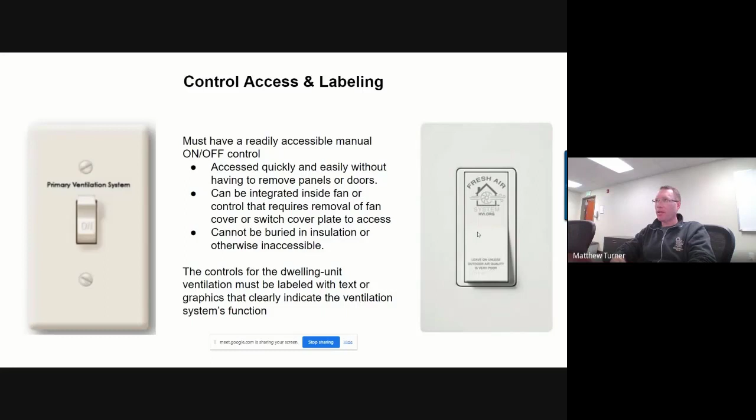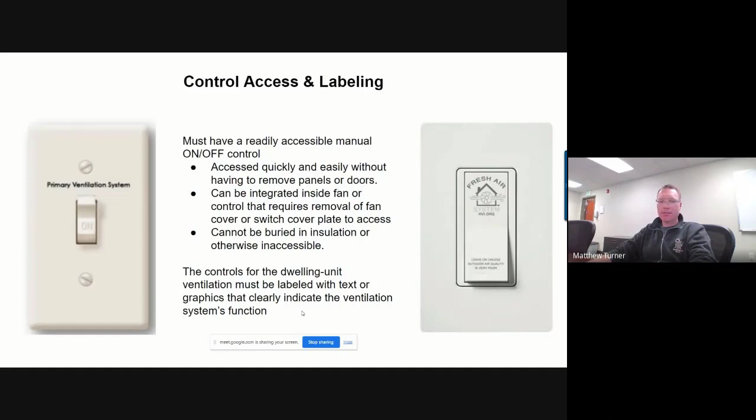So I feel like both of those give the occupant a little bit of an idea of what that switch is for. Hopefully it'll help them remember if somebody new moved in. They might scratch their head about this one. This one would probably be a little easier to understand. So I'd ask you at all of your agencies to ask yourselves, are we putting labels on our controls? And do those labels make sense to the lay person? I did see a label recently that said ASHRAE fan on it. And to the lay person, that probably won't mean much. So maybe rethink what you're putting on that label if you would. So it meets the standard, but give some thought to making that a little clearer for our clients.

The other thing, this one I've actually seen a couple of issues with, and I wanted to talk about it. I don't know if you guys are aware, but clothes dryers are required to be exhausted directly to the outdoors as part of the ASHRAE standard. If you read the ASHRAE standard, it's in section 6.3, and this is exactly what it says.

And then it has an exception for condensing dryers. If somebody has a high efficiency condensing dryer, they don't have to be exhausted at all. But most of our clients' clothes dryers blow air out the bottom of them, and they need to be exhausted to the outdoors.

But yeah, I came across a couple of houses recently where I was out monitoring, and one of the clients brought it to my attention that they didn't think their dryer was venting to the outdoors. And as we dug into it, we found that the client was correct. Although there was a termination, when you turn the dryer on, nothing came out the termination. It had somehow gotten disconnected.

And another one, I recently was going through a file, and in the file, the auditor or the crew, I can't remember which, wrote that the dryer terminates underneath the mobile home, but there was not enough room under the mobile home to get under there to work on it. So the note was basically saying they left the dryer venting directly under the house.

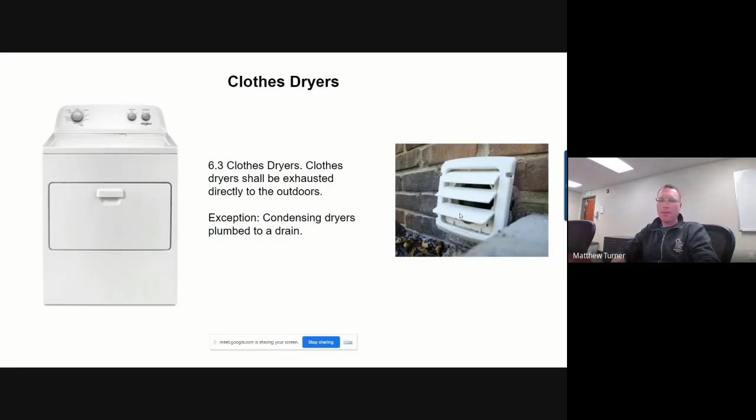So if you run into that type of situation and you are limited on room and space, you're going to have to think outside the box as to how to vent that to the outdoors, whether that's changing your method of running the ventilation under the house or looking for other routes for the vent to run through. But just want to make sure everybody's aware of that. That is an important part of the standard.

This one's just for fun. I haven't seen any issues with it, but carbon monoxide alarms are also part of the standard in section 6.9. In order to comply with ASHRAE, we are supposed to have carbon monoxide alarms in all of the homes that meet the current code, which is one alarm on each habitable level.

And it also specifies it has to meet the NFPA 720 standard, which is, it's got to have the digital readout on the screen, and it's got to have the, is it a 5 or a 10-year battery? I think it's a 5-year sealed compartment, if I remember right. Anyway, I think we're all in compliance there, but just fun fact, carbon monoxide alarms are part of meeting the ASHRAE standard. So any questions on those couple of items before I move on to this next thing I want to talk about?

Okay, so the other thing was I've noticed something at multiple agencies on many homes, and it's just had me wondering. I've asked a few of you some questions about it, and I just want to talk to the whole group about it in case anybody else has run into this situation.

So on the screen, I have a wiring diagram. Brad, the electrician, don't look at my wiring diagram. It might not be up to code, but here's a wiring diagram. This is a typical exhaust fan. This is in most homes. If there's a fan in the bathroom, this is probably what's going on behind the plaster.

There's a service panel somewhere. There's a wire running from the service panel to the junction box that holds the switch. Inside there, the wires are spliced like so, and then the wire runs from that junction box over to the fan. When you flip the switch on, the fan turns on. When you flip the switch off, the fan turns off.

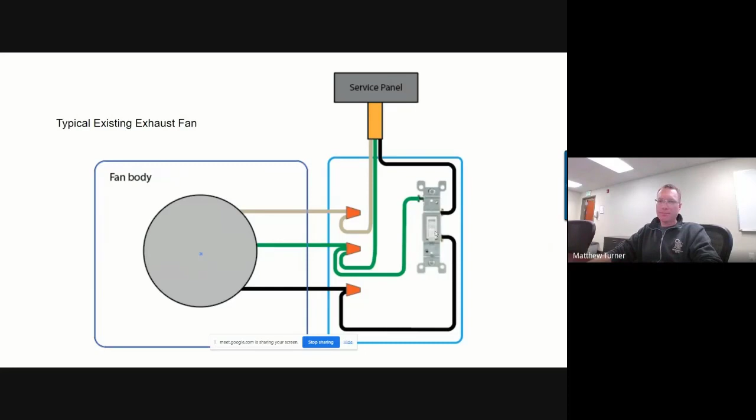Typical wiring. And then we come along, and if we are going to replace that fan with the Panasonic WhisperGreen Select, which is kind of our go-to fan, then this is what we do with the wiring. That same wire that comes from the service panel to the little junction box that holds the switch, that's where we splice the wires together.

And we use the wire that was running between the switch and the old fan to essentially hardwire and power the new fan. And the new fan's smart, so it's okay that we're hardwiring it. That's the way it's designed. And then it has this cool little multi-speed module inside of it. And in order to get that thing going, we have to run an extra piece of Romex between the switch and the fan so that it can control the multi-speed module. And that's what we typically do to get this thing going.

And I guess before I get into the issue that I'm seeing, I want to talk about how this fan works. So inside the fan, it's got a couple of things going on. One of them has this pick-a-flow switch, and that's essentially the speed for our on-demand fan. Like if it was just like our local exhaust fan, where you walk into the bathroom, you flip on the switch. When you flip the switch on, then this fan is going to ramp up to whatever speed you have set on the pick-a-flow switch.

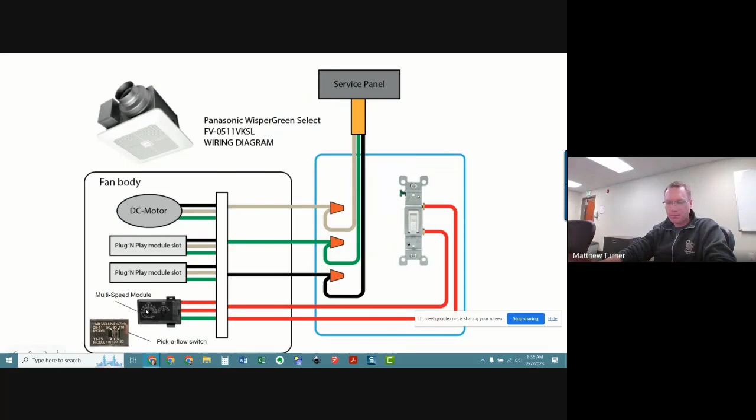As I've been out to agencies this year, I'm seeing a lot of this setup. And what this is, we've got our Panasonic Whisper Green Select set up. But instead of just having a regular switch, the agencies are putting the AirCycler smart exhaust switch into the system. And I think that the reason they're doing this is that it is either difficult or not possible to run that extra piece of Romex. But my question is, when you do this, what is it doing to the multi-speed module?

Why are you wasting your money? Disabling it. Why are you wasting money on a module fan to navigate that? You're paying more. You can buy a fan that runs off a normal switch for less than the module. So for us, we use the motion sensor. We bypass the switch entirely. We don't run any new Romex. We just put a motion sensor in there. It's $30. That way, when the client walks in, fan kicks on, ramps up, and then they walk out. Whatever we have our delay set to, it'll ramp back down to its continuous CFM. So we just take the switch out entirely, hardwire the fan directly.

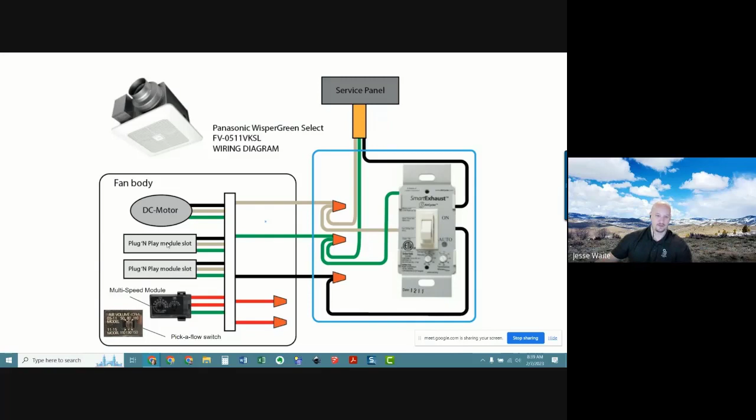So it will run continuously. If this is set at 50, it'll run continuously at 50 without this signal wire. Right. Until the motion sensor senses you, then it'll ramp up to that 80 CFM that you have it set to. And then when you walk out of the bathroom, whatever your time delay is, say it's 5 minutes, 5 minutes later, it'll ramp back down to the 50 or whatever you have it set to. And that's the whole point of the plug and play. That's why they have the motion sensors. That's a great strategy.

And you guys may be aware of others as well as I go through this, but as you heard Brad talking, my whole point is this, and what Zach said: if you wire it up this way, you're essentially making this multi-speed module obsolete. Like you're not using it at all. You bought a fan that costs more and you're not using the feature.

Yeah. Now the smart exhaust switch is a nice switch. It is smart, but we now have 2 smart modules and we're only using one of them. The smart exhaust switch is a good way to do the existing fan. Is it intermittent? Is that the right term? I think those will set up your... We have continuous, too. Well, if you turn it all the way on, they do intermittent.

This is how the smart exhaust switch works. So it's got the same delay minute dial. So you can turn the delay minutes to 10 or 20 minutes. And if somebody flips the switch on and then they switch it back off when they leave the bathroom, it'll keep running for the 10 minutes or whatever you have the delay switch set at. But they don't control the speed of the fan at all.

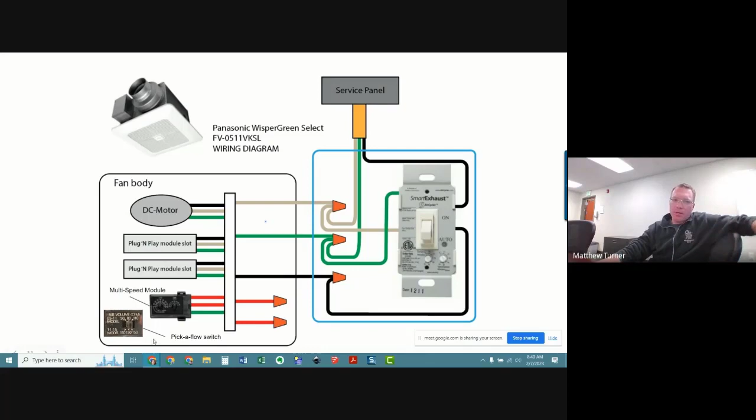All you have going on is whatever you've set the plug or pick-a-flow switch at, so this is now at 80. When this thing is switched on, it's going to run the fan at 80 CFM. When it's off, if there's delay minutes, it'll keep running the fan at 80 CFM. And then, sorry, can't remember which way to scroll. On the right-hand side here, it has ventilation minutes, and you can just tell it how many minutes per hour you want that fan running, but it's still only going to run at 80 CFM.

And the way that it works is if you have it set to ventilate the bathroom for 20 minutes out of every hour, at the top of the hour, it is off and it will stay off until there is only 20 minutes left in the hour, and then it will kick on and run for 20 minutes. And the reason it does that is in case somebody goes in and uses the bathroom. It starts at the top of the hour. If somebody goes in and uses the bathroom for 5 minutes, so they flip the switch on, left it on for 5 minutes, and then they flip it off, and the delay minutes is set at 10, so it'll run for 10 more minutes.

So now it's already run for 15 of the 20 minutes that you needed it to. So then it will stay off for the remainder of the hour, except for the last 5 minutes it kicks on and runs. And so that way it ensures you get your 20 minutes out of every hour, regardless of how many times the bathroom's been used. That's how that one works. It's nice for an intermittent strategy, but

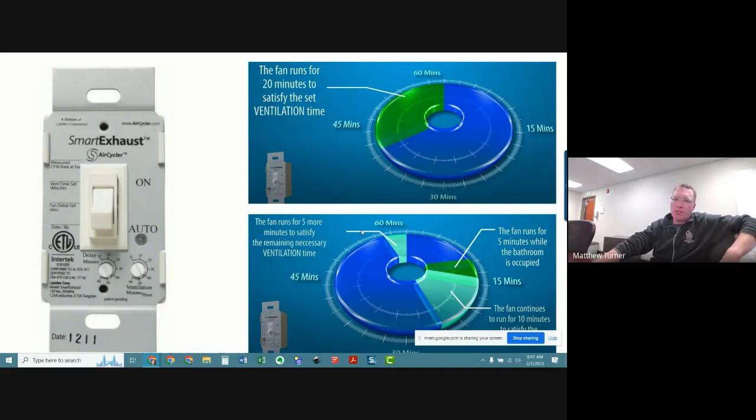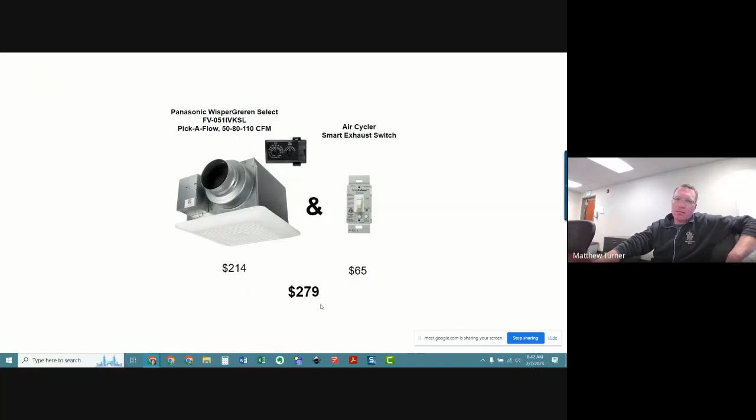I just went onto the interweb and I grabbed the lowest retail price I could find for this Whisper Green Select and the lowest retail price I could find for this. Hopefully you guys have negotiated better prices than these. But the combination of these is $280. You can buy the Panasonic Whisper Green Select without this module in it. It's a little bit cheaper.

It's $21 cheaper. So if you're gonna use the air cycler in the system as an intermittent fan, or if you are running into those issues where you can't run that extra piece of Romex, then you should consider having this on your shelf as well as this. Or you could consider buying just this, and this is sold separately, and then you could plug that in when you need it.

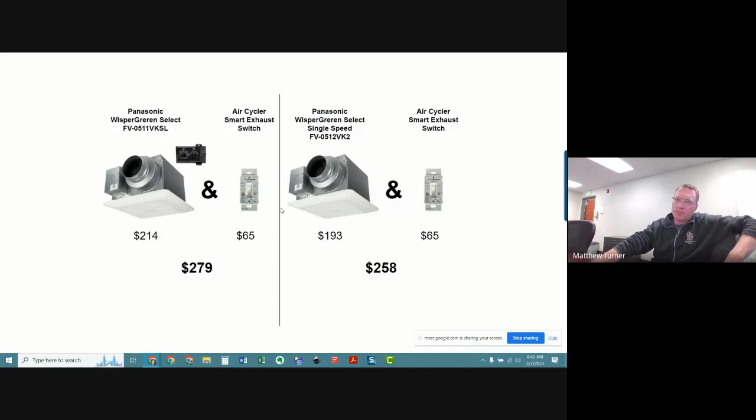Or another option is the Panasonic Whisper Value. So this is also the Whisper Thin, they've renamed it. This one's a great fan to have on your shelf. So this one has the pick-a-flow switch inside. It goes 50, 80, and 100. It doesn't go up to 110 like the other one. But it was tested at less than 1 sone at all 3 of those speeds. So it meets the ASHRAE standard for whole building ventilation.

It has a 3 3/8 inch deep housing, so it can fit into a 2x4 wall. It has a UL listing to be installed in a ceiling or a wall. So this one's very versatile. The one thing you need to keep in mind though with the wall install is that it must be installed 5 feet above the ground or higher. And it has to be installed with the duct adapter pointing upward.

So if you're working on an 8-foot wall, you have some limited space on how long your duct can be and where your termination is going to land on the exterior wall. But that's not a bad tool to have in your toolbox if you need it.

And yeah, just gonna say, so ours, we can't switch between 50, 80, and 100, but we have a bunch of the 80 CFM ones. We'll be happy to give them away to another agency, because they are loud. They're not quiet by any means.

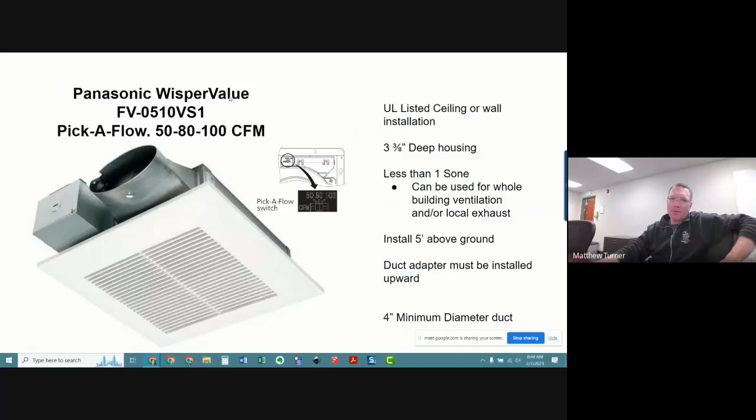No. Gotcha. Well, and I hope this doesn't just feel like a Panasonic commercial. I just pick Panasonic because I know everybody uses them. You guys are welcome to use any product that is out on the market. You have to make sure that it meets the ASHRAE standards. And the big one is the sone rating.

Matt, with ours, the Panasonic, when Lauren bought ours, he couldn't afford the Whisper, so we just bought the Value. I gotcha. Well, I'm glad you guys have recognized the issues there. They could be used as local exhaust fans if that was your strategy, if you were just putting in a local exhaust fan to decrease your local exhaust deficit. But I think your opportunities there are slim.

So anyway, I just wanted to point out, if you be smart about what equipment you're using, then you can save a little bit of money here. This Whisper Value, the lowest retail price I could find the other day on the internet was $95. So comparing it to this one, there is some savings there. I know you may be thinking, well, Matt, you're tripping over $20 here.

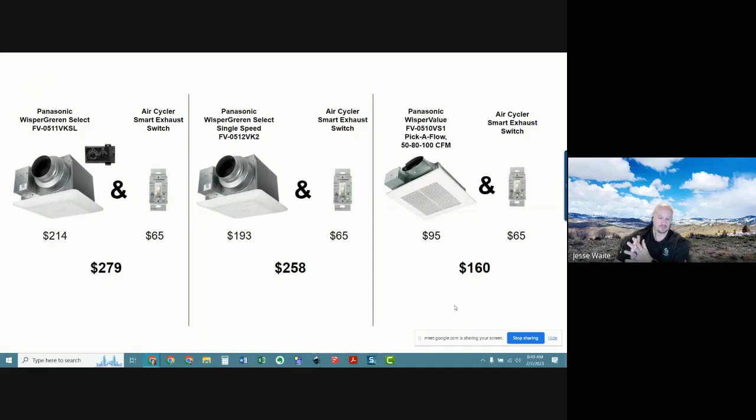No, I appreciate that. That's an excellent point. If I could make one point of clarification on that.

When I'm looking through a file, the trigger that allows you to fix or replace something is going to be the failed worst case draft test. So be very careful: if you think it's close, if it's passing per our standard, you are not justified in replacing stuff. You need to wait until it fails the worst case draft test in most instances. So

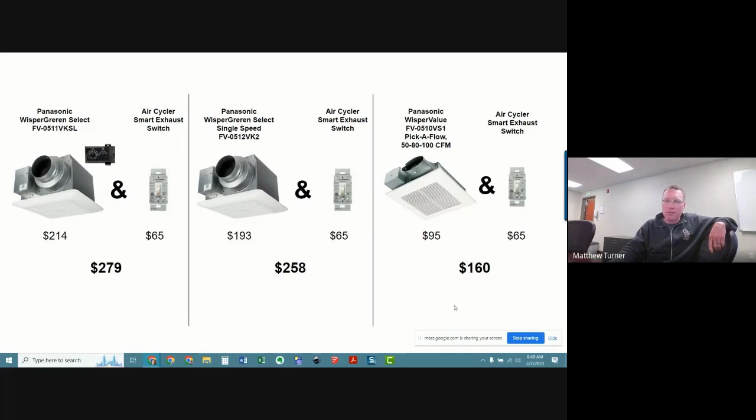I want to talk about the HRVs a little bit more. I've got a slide in a second, but a couple other things have come up. I want to remind everybody, I think I've seen these at almost every agency. Air King does have a range hood fan that's Energy Star certified, and it meets the ASHRAE standard. It's below the 1 sone sound level. They offer it in white, black, and stainless steel, and they offer it in 24, 30, and 36-inch widths.

So if you ever get into that situation where you can't figure out where to put that Whisper Green that you love to put in the bathroom, or you can't go through the roof because it's going to cause problems, maybe take a look at the stove. If you're in a mobile home or something that's starting to look more like a camper, don't forget that they do offer it in 24 inches. So maybe that's a good solution for what you're running into out there.

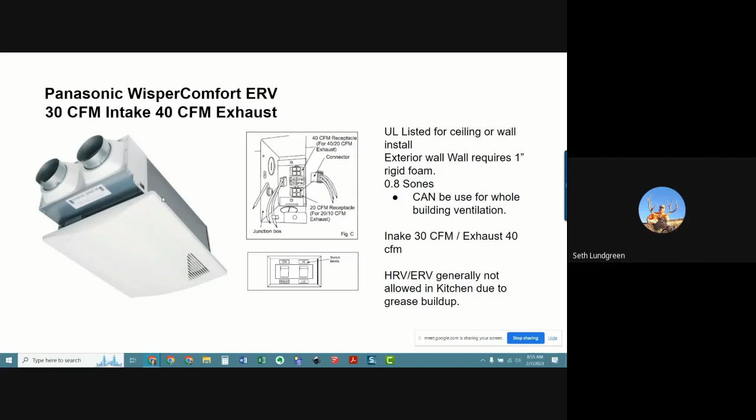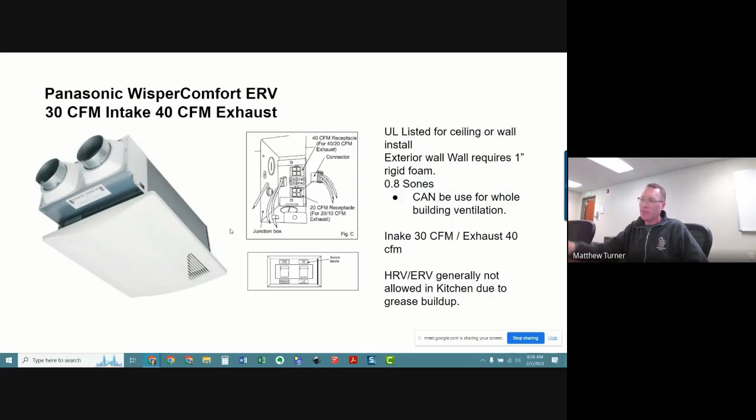Okay, thank you. Yeah, not only can you do that, you should be doing that, because all of your exhaust fans for the full bathrooms and kitchens should be vented to the outside. Your auditors should be checking that when you get to the house and determining whether or not they actually vent to the outside. And if they don't, since ASHRAE requires that all local exhaust fans vent to the exterior of the home, you should be venting them to the exterior of the home. But make sure you understand how that plays into the calculation for your ventilation. It doesn't give you a lot of credit for those fans, even though you turn around and vent them to the outside. Yeah.

This is something else if it's not going to fit. I just want to make sure everybody has it in the back of their mind. This might come in handy from time to time. I've talked to a couple of folks about this, wanted to share it with the whole group. I was at a conference last summer, and Cal Steiner brought in a bunch of guys from the field and basically just had them get up and talk about some of their favorite tips and tricks. And this guy out of Washington shared this one, and I thought it was kind of cool. So he basically has been building this little box anytime the cavity is not deep enough for him to put the fan entirely into the cavity.

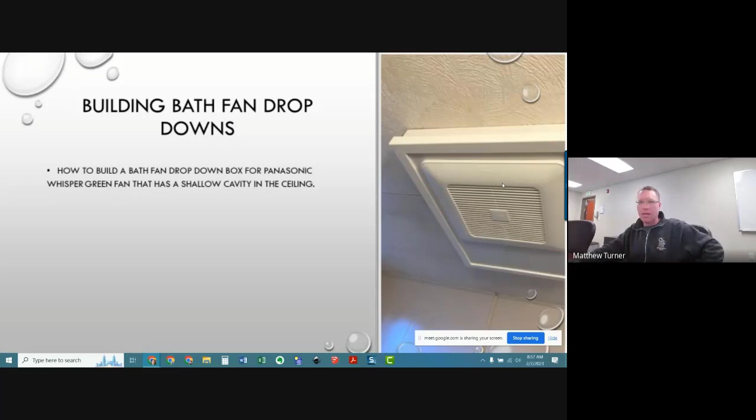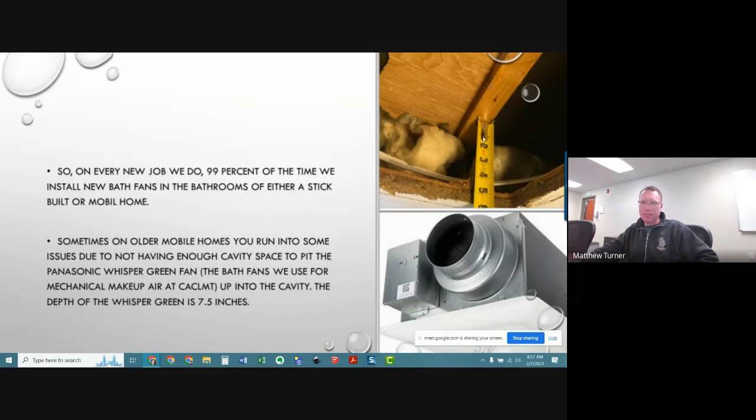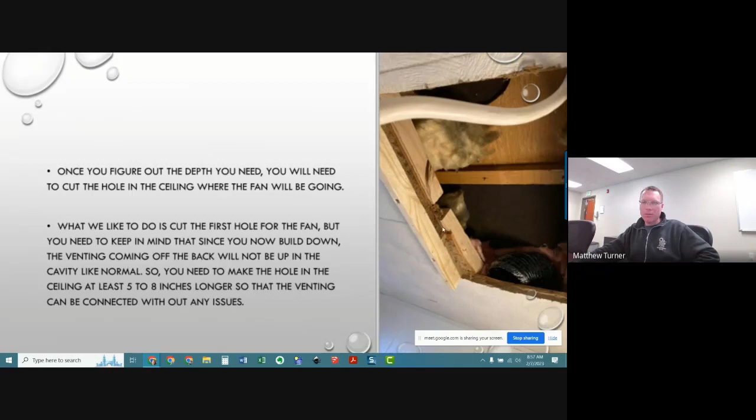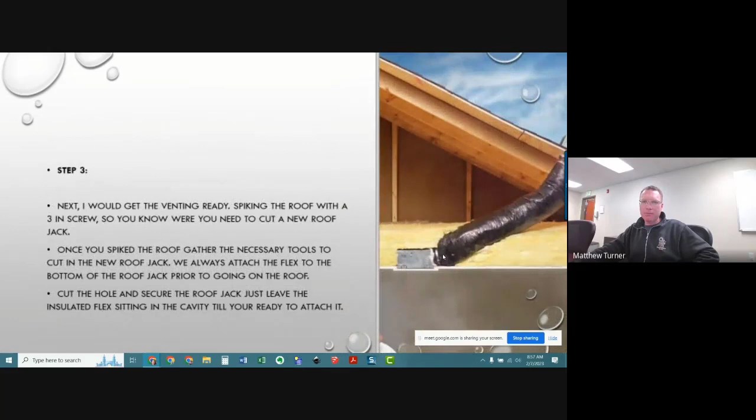And I'll just flip through the slides really quickly. I think it's pretty self-explanatory. He's just showing that, I think that has a 7.5 or 8.5 inch housing on it, and there's only 6 inches of depth in the cavity. So it needs to poke out into the room a little bit. He's showing how he's adding some structure around the mobile home hole that he cut there. And he just builds a frame, puts some OSB on it, runs the vent outside, and then he skins it with like some melamine or something.

And he said he likes to use an 18 gauge pin nailer so you can fill the holes with caulk really easily. And I really like how he's trimmed it out in white. That's a pretty clean finish. Might come in handy in certain situations. One of the things he did point out in his notes was that you've got to be careful that a door is not going to swing out and bonk that on the ceiling or wherever you're installing it. So make sure you're thinking through all that stuff before you install that. But if that's helpful from time to time, that might be something valuable.

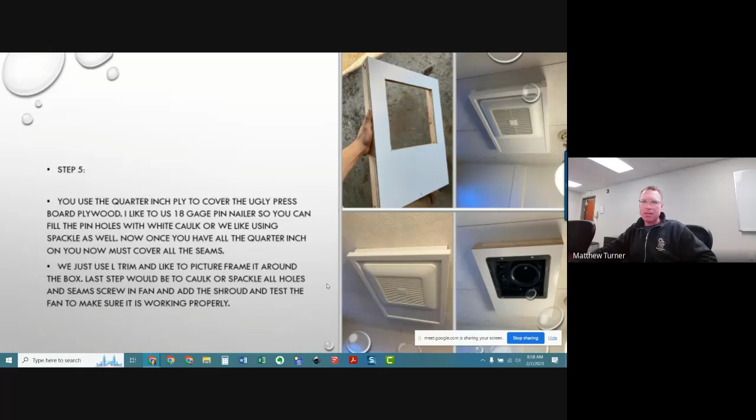And then he also acknowledged the Whisper Thin can often be a better option, just because it can fit inside the wall cavity. But is anybody else aware of any tips and tricks or pitfalls that we should avoid when it comes to our ASHRAE ventilation?

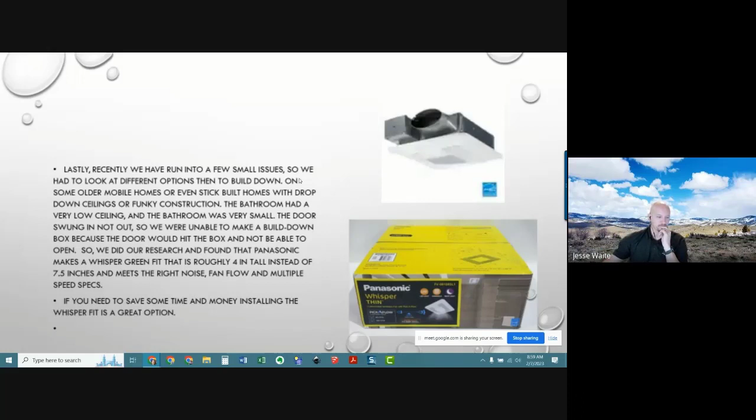I know for us, we've had to build it down a couple times, but also in mobile homes, especially when there's not enough room, if there's the water heater closet that jogs into it, you can install it into the wall of the water heater closet, but up high, and vent it right out above the water heater closet door. Great one. Yeah, I've seen that in a couple of homes. It works really well because you're not having to deal with the thin exterior walls. So thank you.